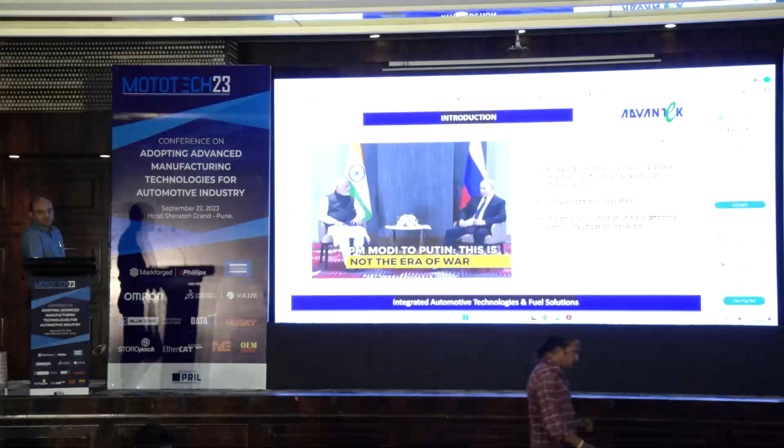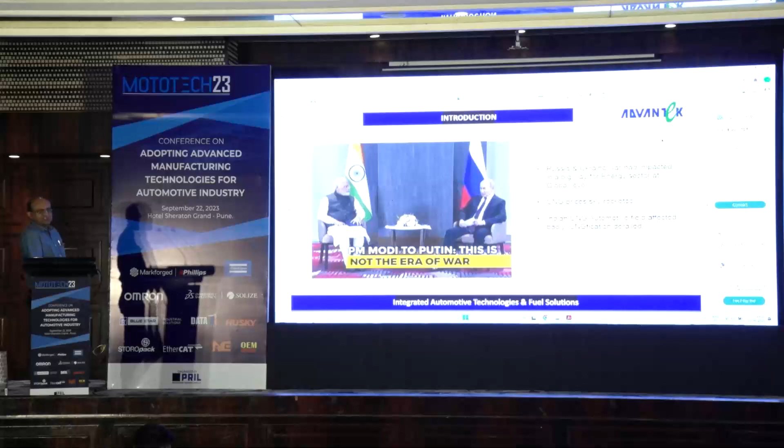We'll briefly discuss what is happening at the global level. The sentence, "This is not the era of war," became world famous. And it impacted the fuel industry in a big way. CNG prices skyrocketed and it badly pushed the CNG market down. Now we say this era is for alternate fuels. We have seen a lot of things happening in G20, and the Global Biofuel Alliance was formed with the leadership of India with many countries participating.

A very interesting story of automotives, and I'm very happy I'm part of that. An inspiring journey of the last 125 years to aspiring humankind. When the first automobile was ready, it was steam powered. Water was the intake. Now again water is the intake, indirectly or directly, through H2 fuel cell vehicles, and even the exhaust is water. Earlier there were no norms for emission. Now the norm is no emission. I'm just trying to build an interesting link in this field. People always say wheels can't be reinvented, but alternate fuel is making us experience that yes, wheels can be accelerated.

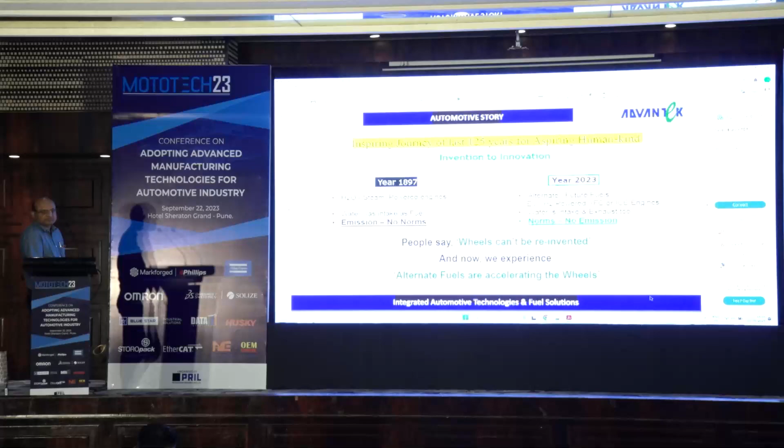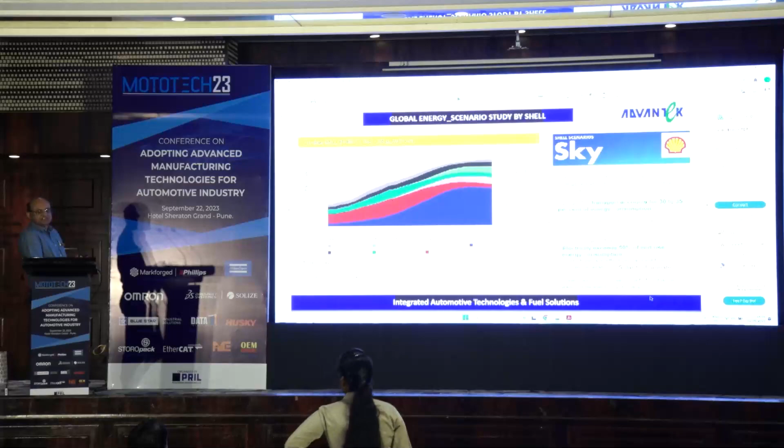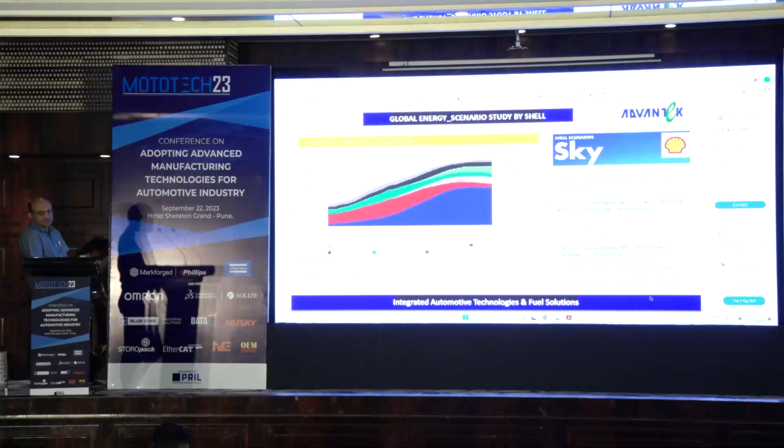This is a study by Shell. Shell top officials met me in 2014 when I was in Tata Motors. They said that EV will not come, electric energy will not come in this world for at least 50-60 years. The same Shell is saying by 2070 or 2080, 50% of energy requirement will be from electric sources. They have given some justification and backup. All the cars will be electric by 2050 at a global level, and things are happening that way.

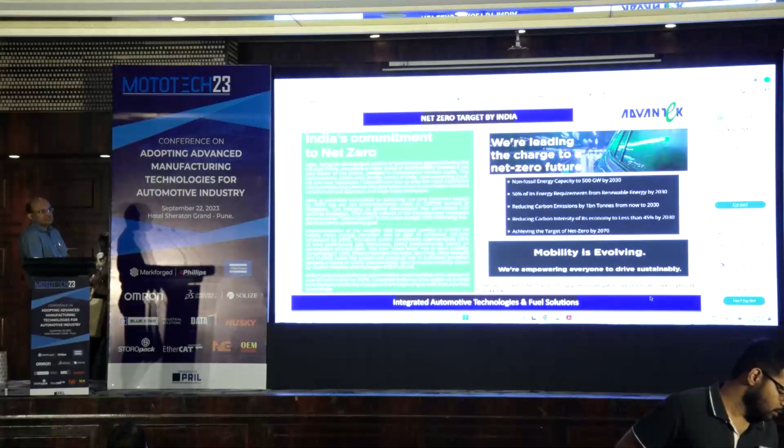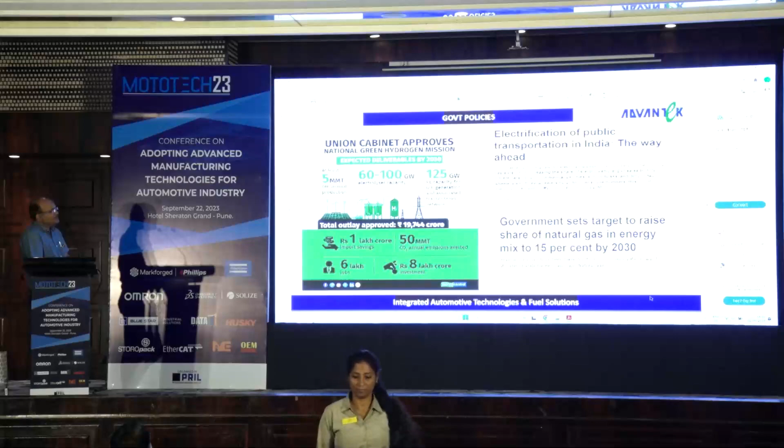India is committed, and almost 150 plus countries have said they will meet their net zero target by 2050. But India being a big country with huge demography and population, our government has taken the target of net zero by 2070. It is a long period, but we are going very aggressively on that. Some time back, the hydrogen mission was formed with the target of making 5 MMT green hydrogen with 60 to 100 gigawatt capacity of electrolyzers, and certain specific targets were there and huge money outlay was planned.

On the other side, the government is saying that we should have huge electrification by 2030, like 70% CVs, 30% PVs and almost 80-90% two-wheelers and three-wheelers. There is a little doubt how 70% can be done for CVs, but something will come out and we as a complete industry have to work toward that. CNG contribution in the energy mix is now 6%. It is planned to take it to 15% by 2030.

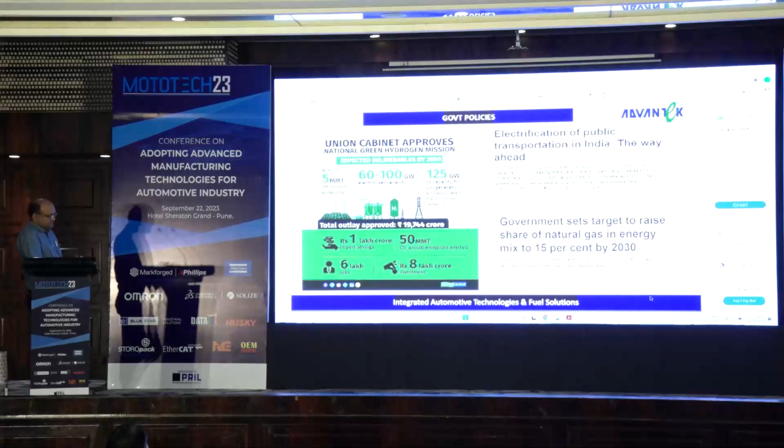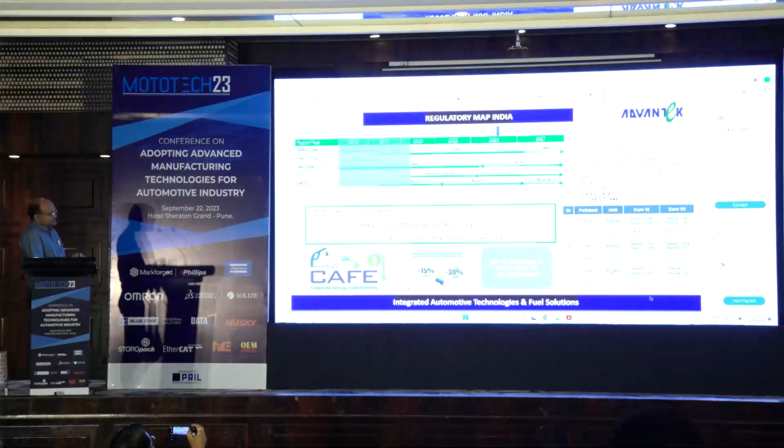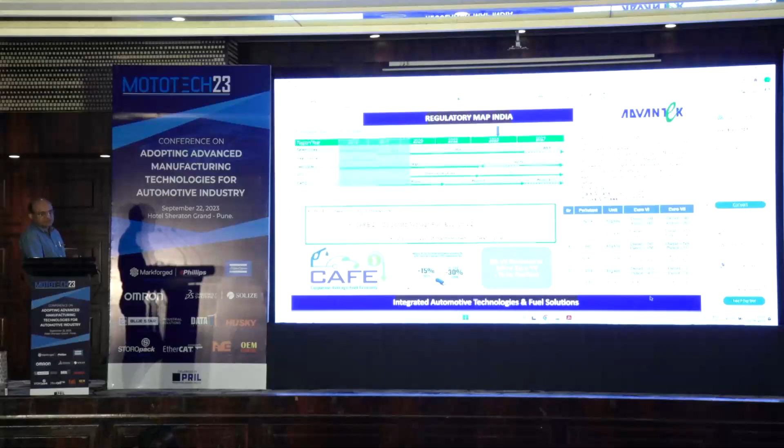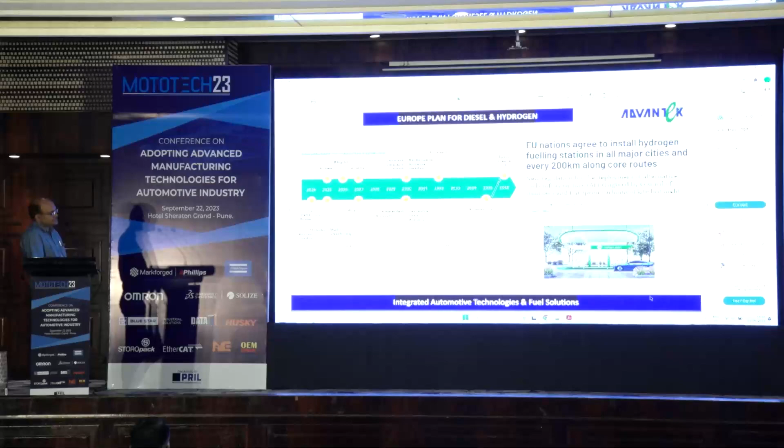From a regulation point of view, right now in 2023, BS7 will come, hopefully by 2025, and it is a very strict norm, at par with Euro 7. BS7 can affect alternate fuels a lot, so this is very important from that angle. CAFE norms were supposed to come, but they have not come. This again will help alternate fuels in a big way. At the international level, Europe has decided that they will ban diesel engines from certain years, from 2024 to 2030. At the same time, the same Europe says that they will start putting up hydrogen facilities. Something different from the India perspective.

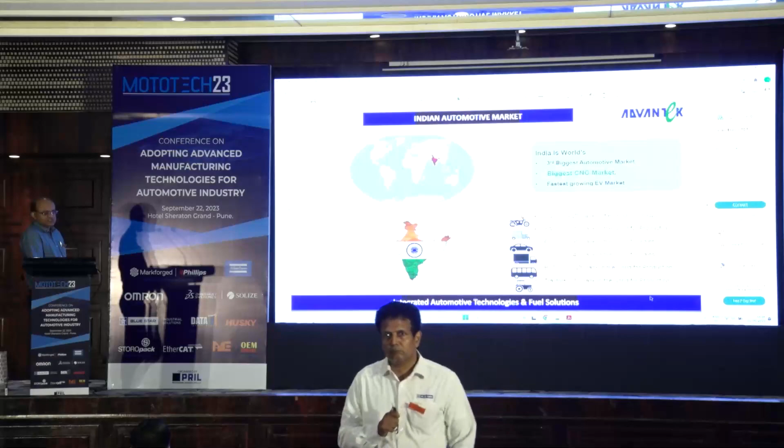We'll go to a little bit of statistics. I will not spend more time, but it is very interesting. I wanted to maintain the flow also. From this stage, I'm very happy to declare that India is the world's biggest CNG market. I tried to find out a lot of information, met in many network forums. Nobody could say it, but with my statistics, it is very clear that India is the world's biggest CNG market.

One of the fastest moving EV markets, and now we are number 3 as a whole automotive market by the amount of money involved. At the same time, in two-wheelers we have the second rank in the world. Three-wheeler, first rank. PV, third rank. CV, fourth. Bus, second, and tractors, number 1. So, huge scope for India because of a lot of product mixes available, and we are moving very aggressively.

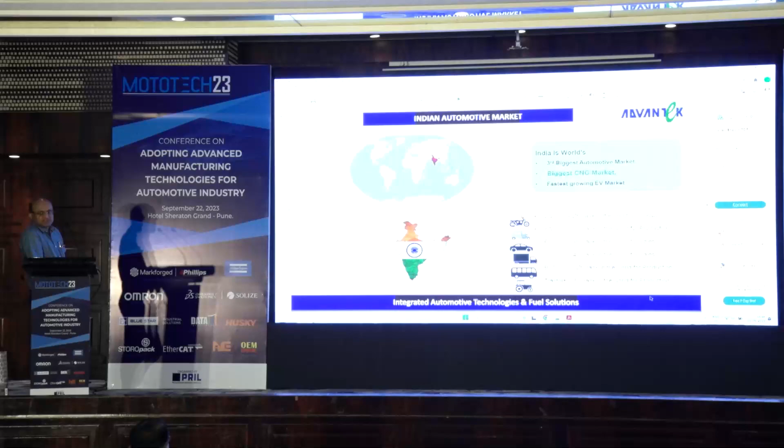Just again statistics, some time back somebody asked about stations. So, EV charging stations, almost 5,000 are there right now. H2 filling stations are only 2, just for some development purpose. And diesel, petrol almost 80,000, CNG 5,700, LPG 1,177, but LPG is dying, almost dying. Only three-wheelers are there. I was saying third biggest automotive market, which is perfectly aligned to make India the third largest economy. That's a direct correlation.

I will not spend more time here. EV contributed 5.4% last year. CNG contributed 3% by volume, and it is growing very fast. This is about two-wheelers, again moving very fast.

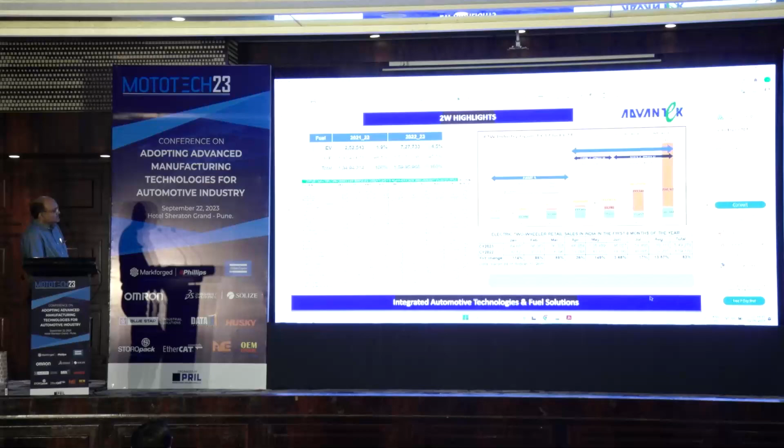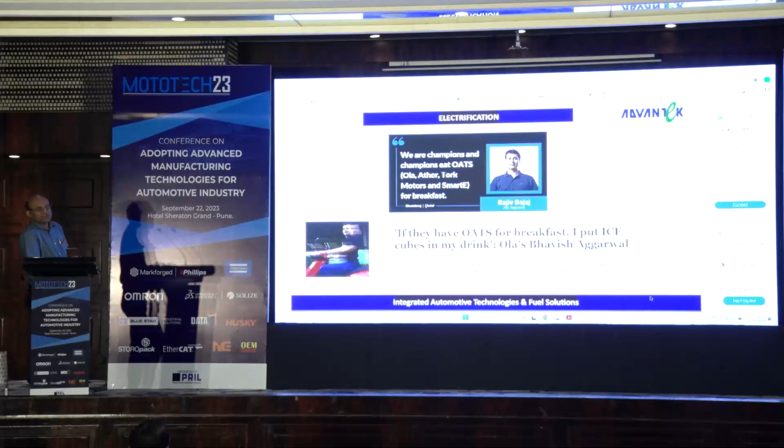I remember this kind of intense fight between these OEMs. Somebody said in two-wheelers there are a lot of new players, legacy players are not much there. So Mr. Bajaj said, we eat oats. The answer given by Ola was, we put ice cubes in our drinks. See how the fight is going. Ultimately, the customer is going to benefit.

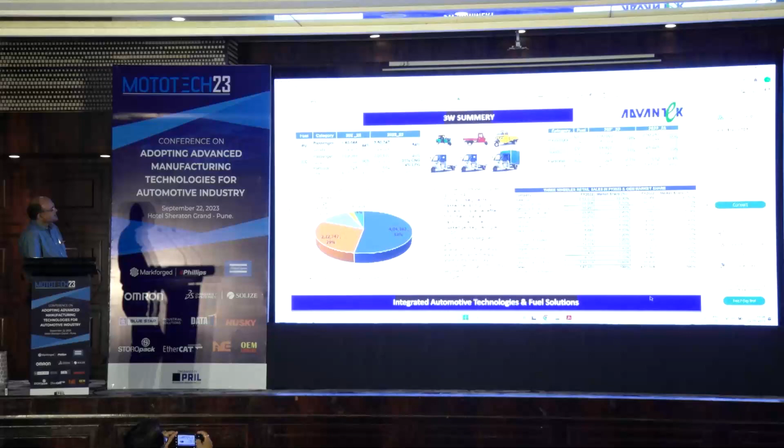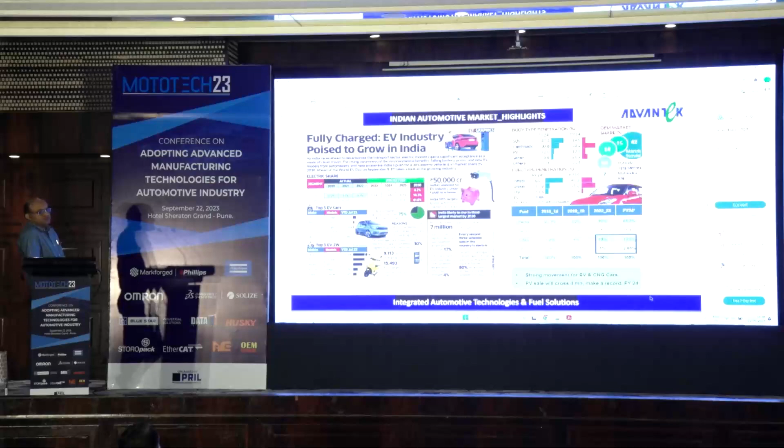Three-wheeler has the highest penetration of EV, 54% and growing very rapidly. CNG almost 31%. Only LPG with three-wheeler is 4%. If you see in PV, CNGification and electric are moving very fast. You see the change in even the last 1 year. 10% to 13.5, even 1% to 2.3%. So even in 1 year, a huge change, so we can understand the pace of change or rate of change.

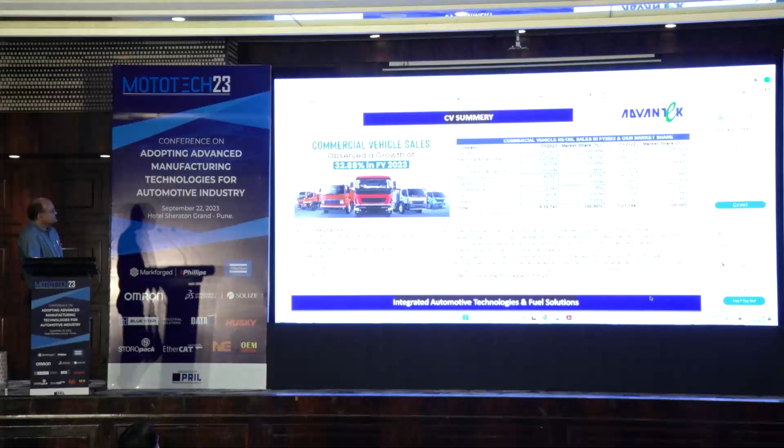CV now only has CNG, almost 9 to 10%, or last year it was 11%. But huge scope for other options, we'll see next. The tractor industry, the world's biggest tractor industry is in India, and right now they're only on diesel. So I think it's a good option to go for CNG for many other reasons. Nobody explored this, but huge scope for us.

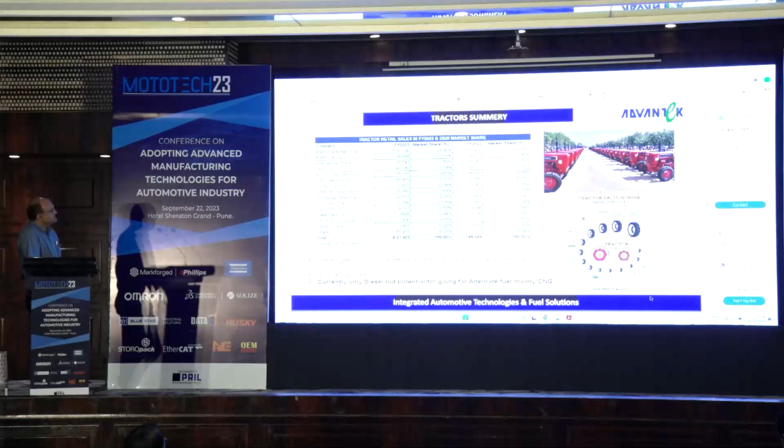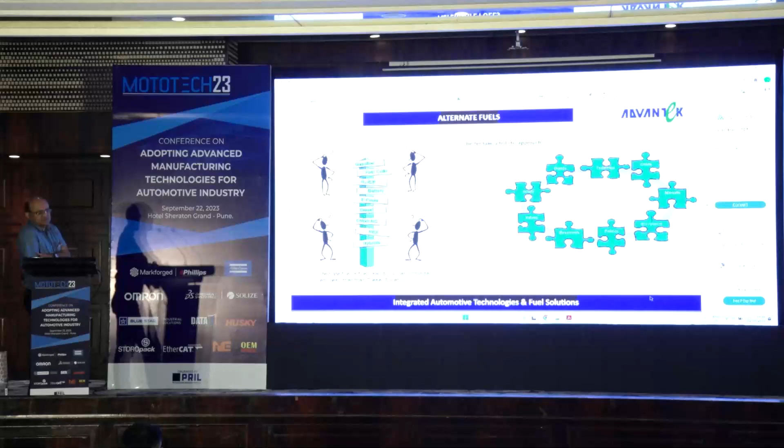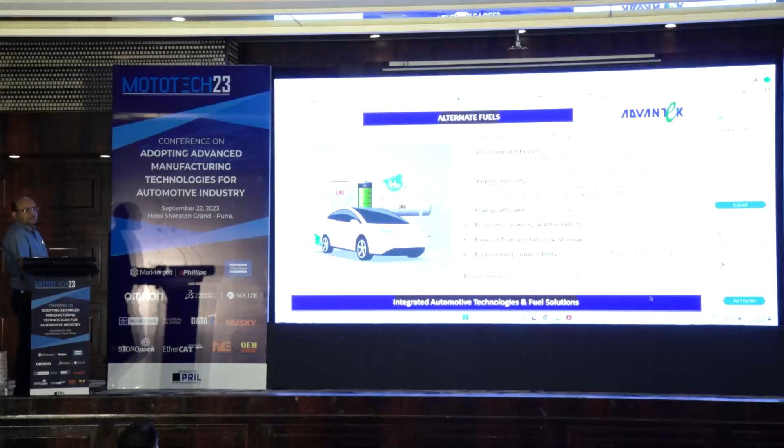Now we'll see what the alternate fuel options are. Right now we are confused what to do. Policy is not clear, they are not integrated. But as a whole industry, we have to make very great efforts, have some synergy, good team building like that. As per me, for any fuel to become an alternate fuel, 6 E's are required. First is environment friendly. Of course, we have to meet emission norms, and it should be environment friendly. Energy security, that means we should get the raw material required for energy in-house, local. Of course, it should be energy efficient.

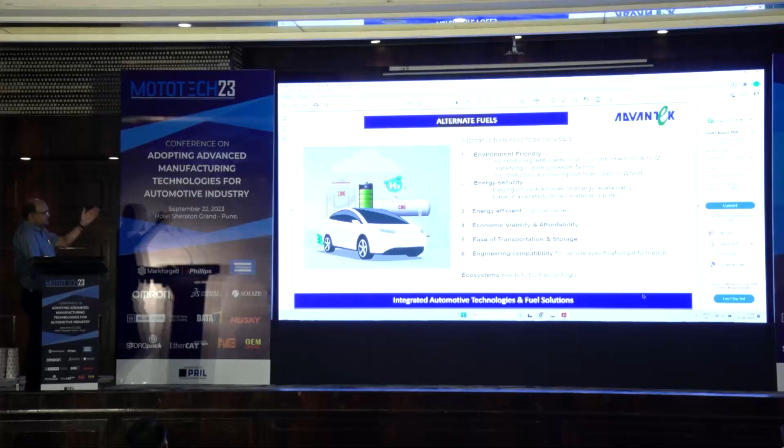Of course, it should have economic viability from a complete capex kind of view, even for customers to afford the fuel cost. At the same time, it should be easy for handling and transportation, and a compatible vehicle. What kind of vehicle should meet the target? Because there is always some relation between fuel and vehicle class. We should meet that. So therefore, we have to have the whole ecosystem ready for that. I prepared this with a lot of effort because I could not find anywhere on the internet how to classify fuels.

Both these biofuels and synthetic fuels are basically converted from waste. So what to do with waste is a big problem, and how to get energy is a big problem. So one problem is solving another problem. So right from waste we are converting to reusable or efficient energy. It's very interesting, and we have to give huge focus to that.

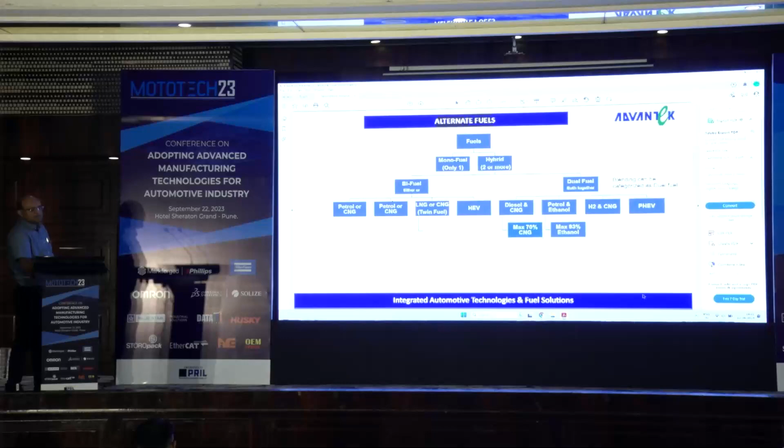Once we developed this CNG and LNG with one OEM, very interesting. Both are basically the same fuel. So we're giving it the name twin fuel, because only the storage becomes different, and the next parts like regulator, filter, and the rest of the fuel system remain the same. So a very interesting proposal. We are giving it the name twin fuel.

In dual fuel, diesel and CNG, max 70% CNG can work, and basically this technology is given in generators, but even vehicles also have that. Petrol, ethanol. Ethanol is being mixed in petrol. Right now, India is at 10%, but there is a big plan to go to 20% by 2025. And ultimately, you can go max up to 85%. That is called flex fuel.

Even next is hydrogen and CNG. We can mix some percentage of hydrogen in CNG to make that fuel more efficient. People say 5%, 10%. We are developing the technology with SAE and COEP, so we'll get to know more on that. And next is plug-in hybrid, where two fuels are run together.

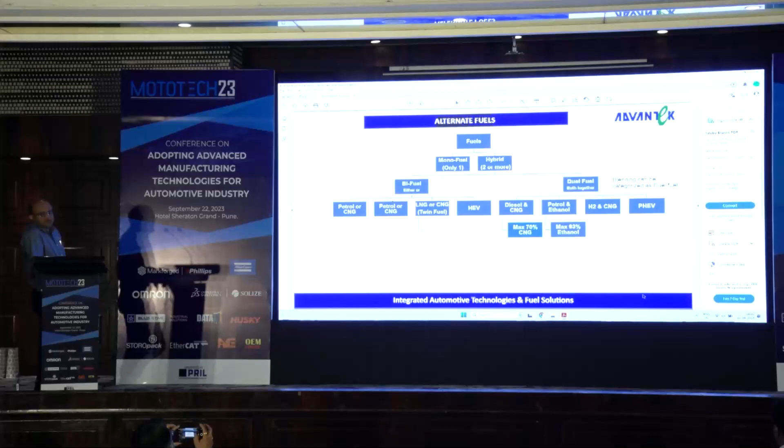Again, one more fundamental is fuel blending. Instead of developing new fuel, just mix some alternate fuel in the main fuel. I said ethanol is already there, 10%. Next is 20% from 2025, which was preponed from 2030. And now people are thinking of 5% biodiesel in main diesel. We'll see what biofuel is next. It is going to take some time. Therefore, people are thinking, how can we blend ethanol in diesel? A lot of trials are going on.

One more field coming is methanol. People even say methanol economy. Huge scope for methanol. 15% blending can be done in petrol. Again, things are happening. And I said hydrogen mixing in CNG. So these are the fuel blending options. A lot of things will happen. Percentages will become plus or minus, but things are happening, and it's going to help directly save on the import bill.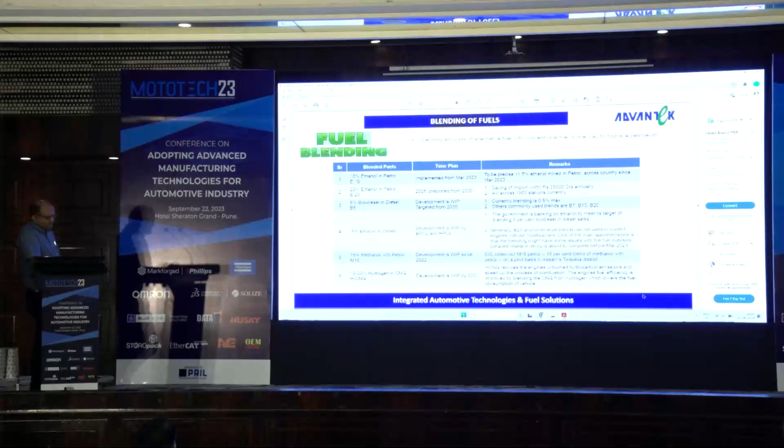Next is biogas. Biogas has a lot of names, so people get confused. It's mainly gobar gas, a word we have known for many years. Then purified biogas is called bio-CNG, which again is RNG. The names are different, but the meaning is the same. This is purified biogas. Compressed biogas, people say CBG, is the same biogas compressed to store it effectively. Ethanol, bioethanol and methanol are again liquid fuels converted from waste.

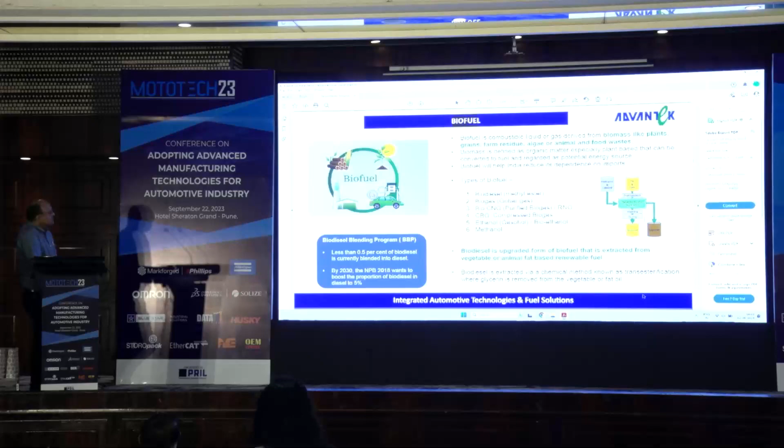So our government has very proactively formed a strategy or policy for biofuels. The recent focus from the G20 will make things more and more clear, and we are working with a lot of ministries. They're giving us a chance to come together and express our opinion. And the main important benefit is biofuels will not ask for any big change in the vehicle or in storage systems. So no big change in storage and no big change in vehicle. So it becomes very easy to use.

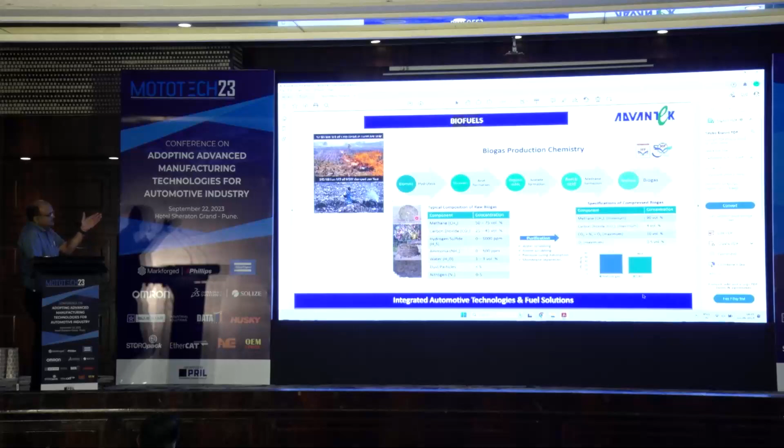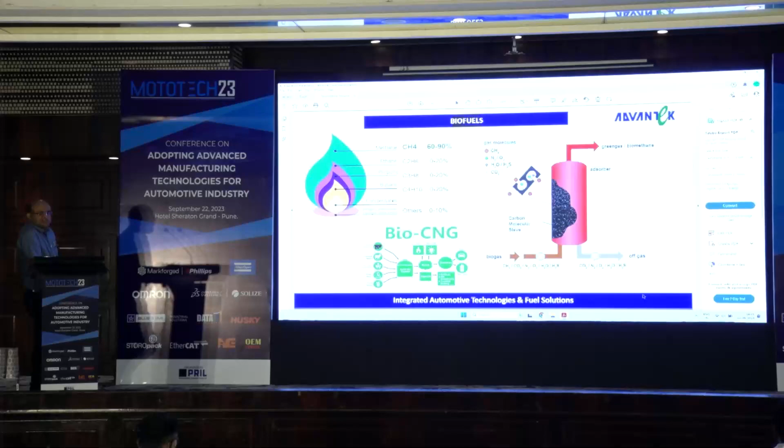Some process is given, again converting from waste; these are the chemical reactions. A lot of formulas are there. We'll not go that deep. Even just by sending biogas into an adsorber, which is basically carbon, we can get biomethane. So many times things are very simple. We have not given them sufficient time and effort.

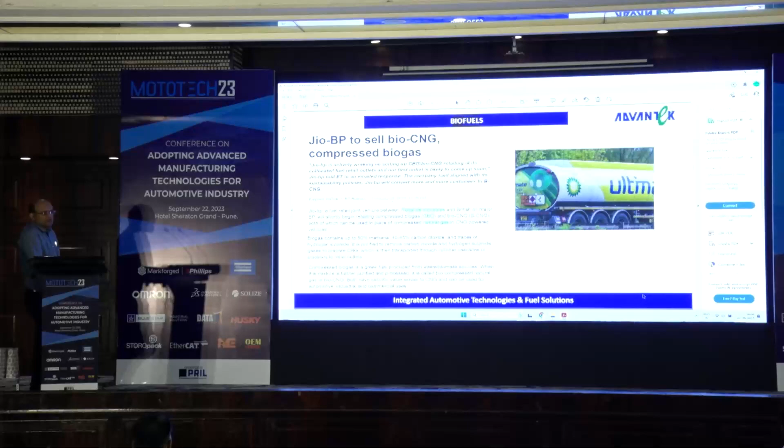When Reliance enters, things happen. That's my opinion, because they're entering bio-CNG, they're entering hydrogen in a big way. So whatever timeline we say, my opinion is when Reliance enters, things can perform. So we have to be ready for that.

One more fuel category, synthetic fuels, is a very interesting fundamental: whatever carbon is emitted by industrial exhaust, industrial waste, or even vehicle exhaust is collected back into the chain, combined with hydrogen through some chemical reaction. There are different names, the FT process; we will not go into that detail. And again, fuels very similar to diesel, petrol, and fossil fuels are generated.

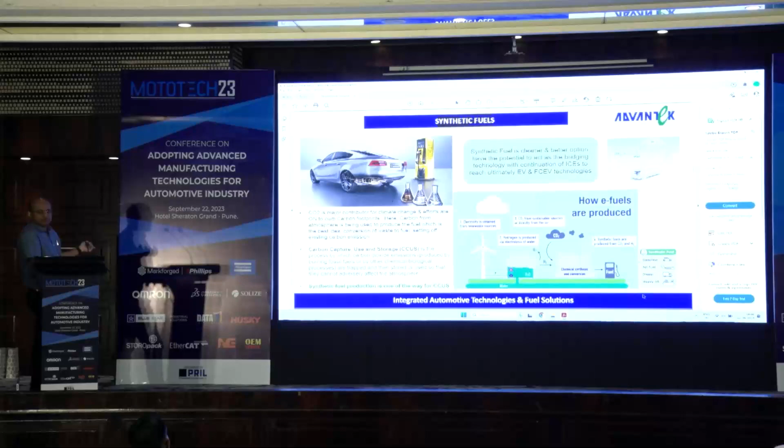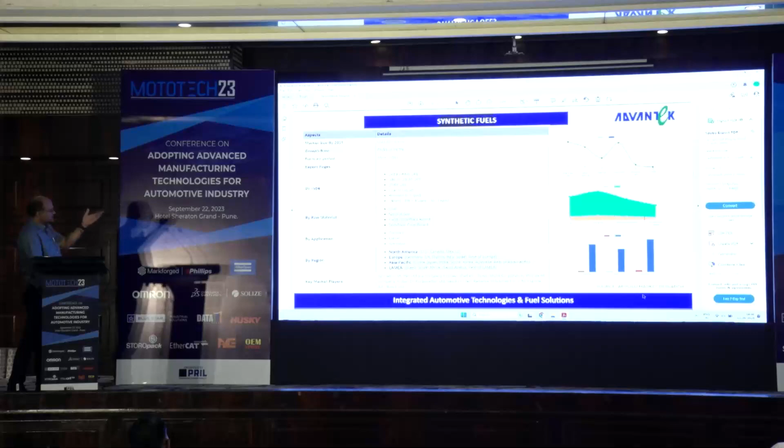So it's very interesting fundamentals here also. There are various types of synthetic fuels by type, by raw material, application. We will not go in deep. A lot of efforts are being put there.

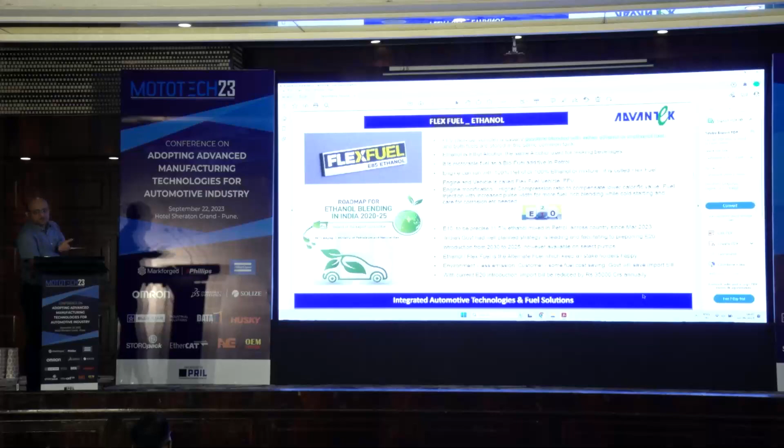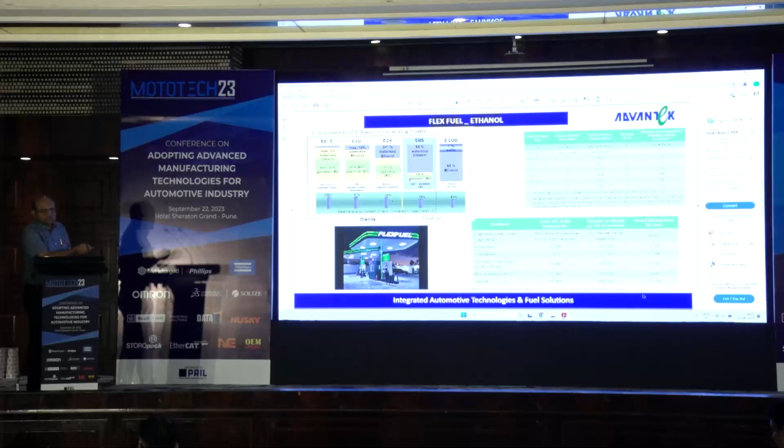Flex fuel, which I said some time back, ethanol is added 10%, but we can go up to 93%, and absolutely we can run. It's called flex fuel because you can run 0% to 100% ethanol petrol. We have to program ECUs and the whole chain, and basically fuel lines to have corrosion resistance power. So the vehicle can run any mix. These are the typical E10, E24, E85, generally used mainly in Brazil, US and other parts of the world. For practicality, we can have any mixture.

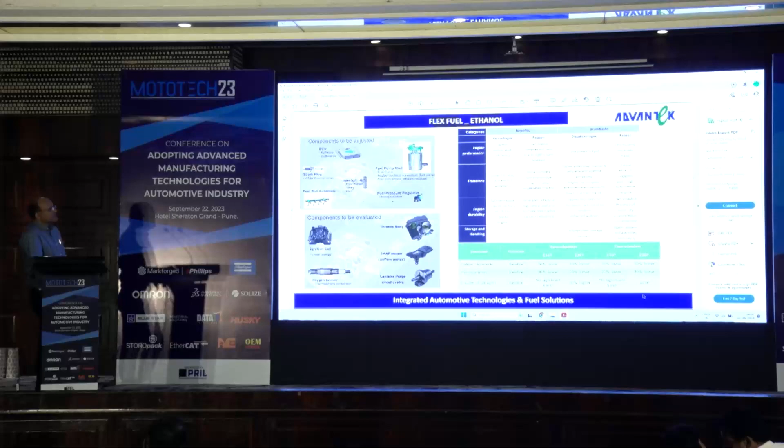What kind of changes are required for the vehicle, what kind of benefit we'll get, just mapped it there. This is a very interesting fundamental, something different launched by Toyota, which is the first flex fuel, and it was clubbed with electric. So electric and the other fuel is biofuel, but flex fuel itself is dual fuel. So it's a combination of biofuel and flex dual fuel. So they have launched the vehicle as a demonstration technically, but soon it will come in the market.

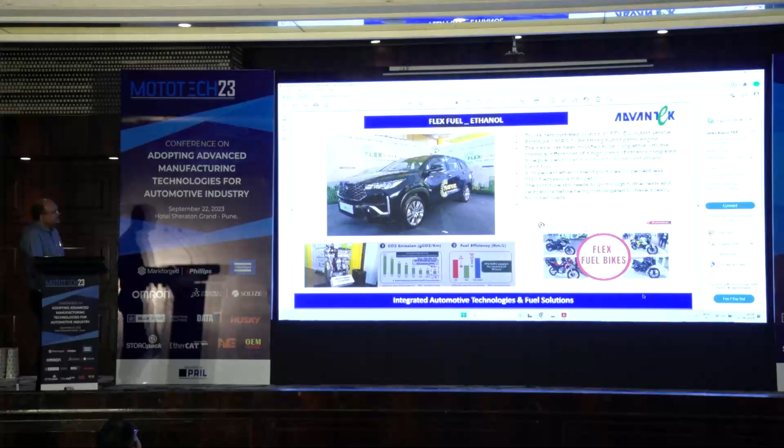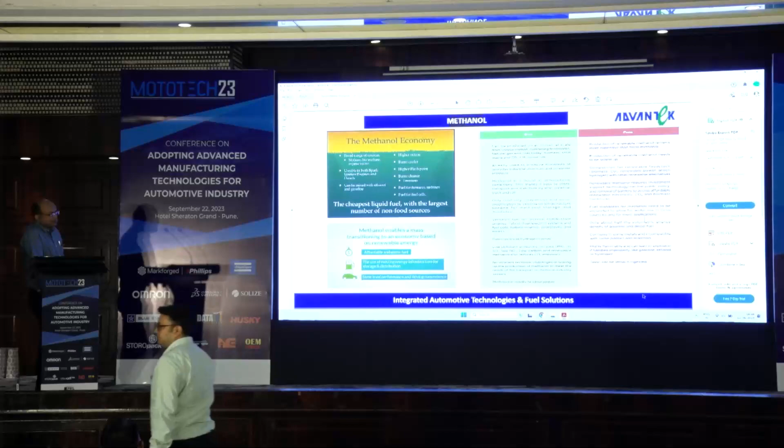Methanol, I said, again part of biofuel. Again, a lot of good efforts are being put, and I think people are saying that methanol can be used better in CVs, diesel engines. It has to have SI, but it will be good if you could use methanol for commercial vehicles, which can replace diesel, in short.

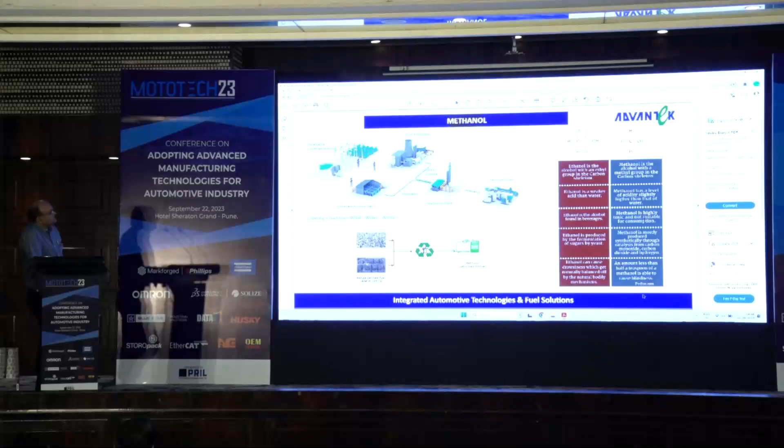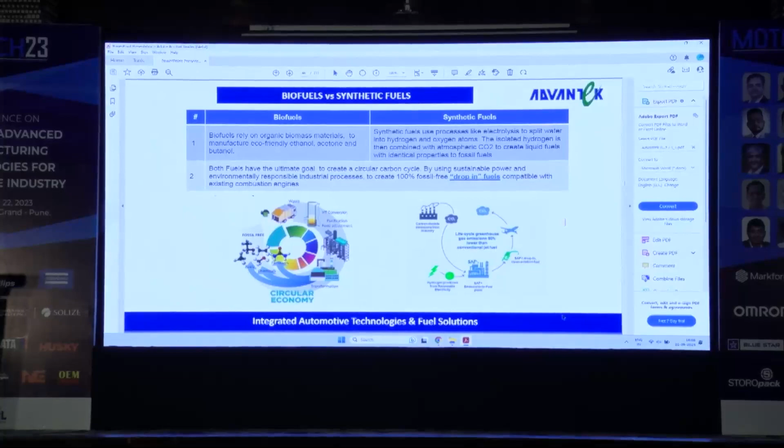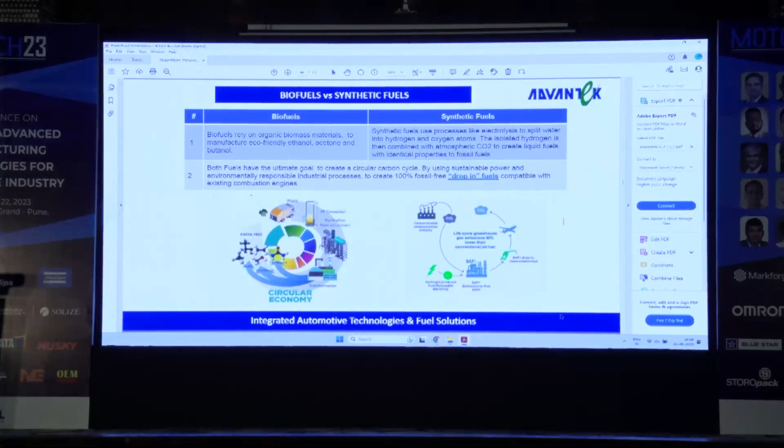So comparison and some changes. Biofuel and synthetic fuels, basic properties remain the same. The only difference is how they are made. I said synthetic fuel is basically capturing carbon from atmosphere and waste, and conversion through a chemical process to fuel. And biofuels, we have seen some time back, conversion from waste to energy. And people always talk circular economy. Nothing but we are using the same parts again and again in the whole circular economy.

I'm trying to make things simple, and when I started learning because of this offer to speak, I really went so deep and am getting really enriched. So I'm happy. I'm not an expert, but I'm learning, sharing, and by sharing I'm getting more and more knowledge.

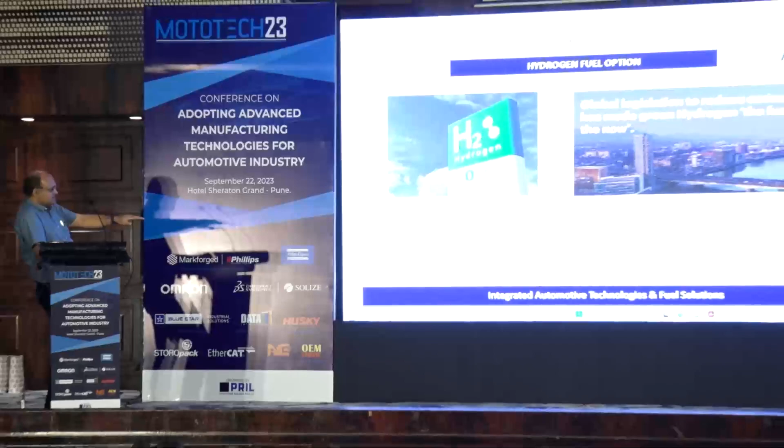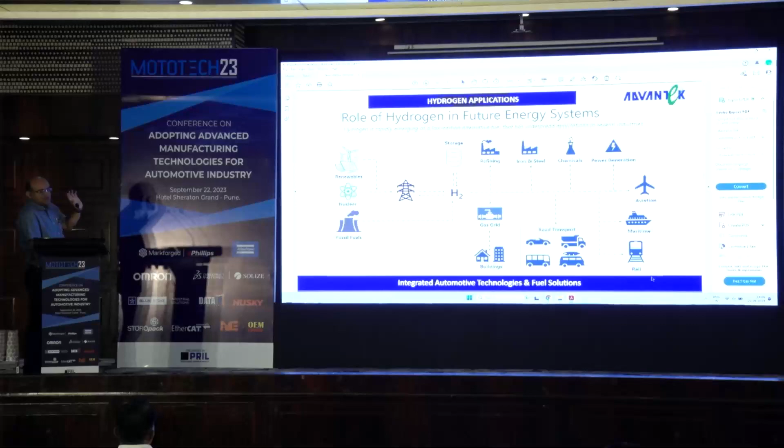Electric vehicles, we have a lot of electric vehicles. I will not speak more because the whole world talks, so I will not talk on that subject. We'll talk more on hydrogen. Hydrogen, there are three ways to use hydrogen: hydrogen mixing, H2ICE, that means IC engines, and fuel cell. There are huge benefits of hydrogen. Hydrogen can be used in various fields, various applications. So the future is hydrogen, that's very sure.

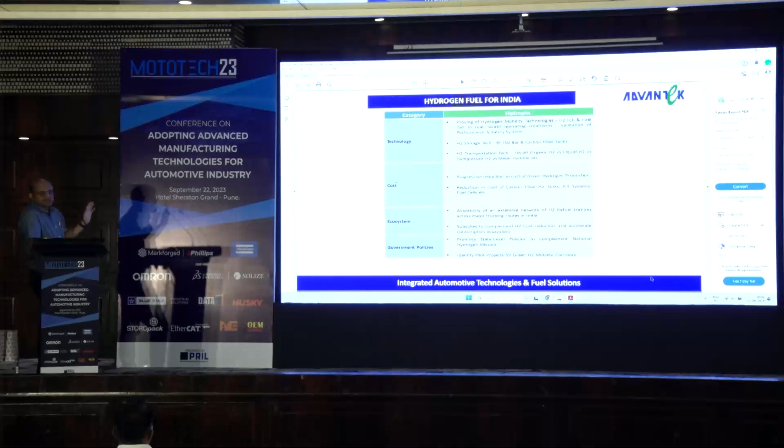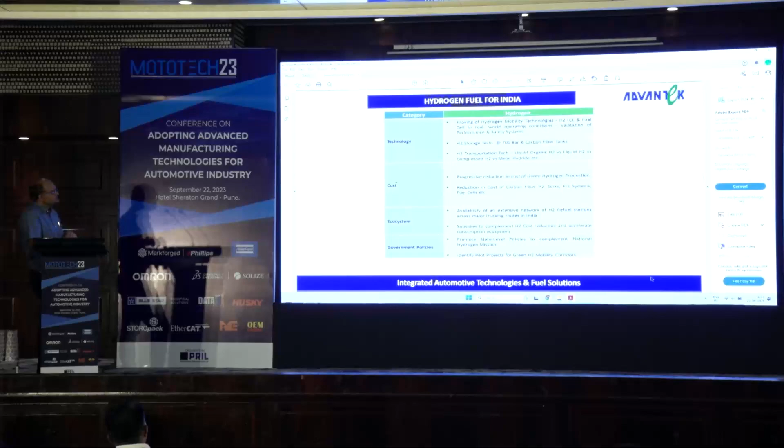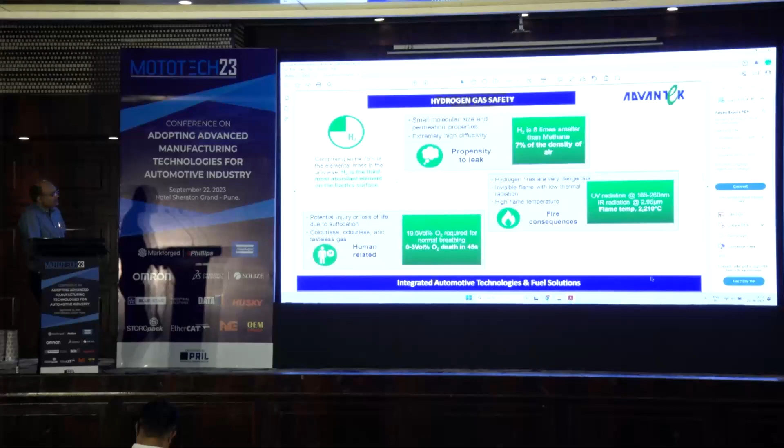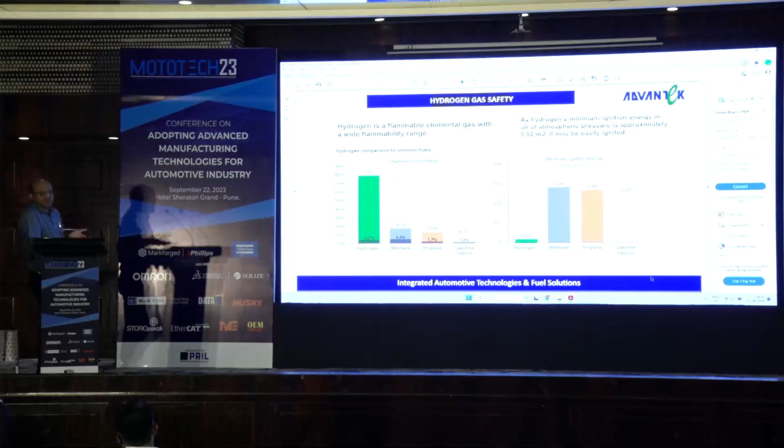Again, people always say hydrogen is a bomb. You see the qualities of hydrogen, it's very risky to handle, but if you take proper precautions, nothing difficult. Hydrogen requires very little energy to ignite, and it has a very wide band to burn, from 4% to 75%. If the mixture with air is from 4% to 75%, it can catch fire. And it is odorless, we cannot see it, you cannot even see the flame. So it's very difficult to work with hydrogen.

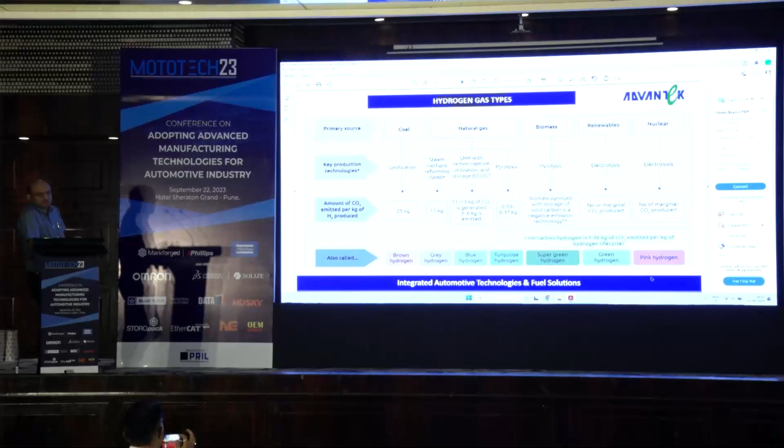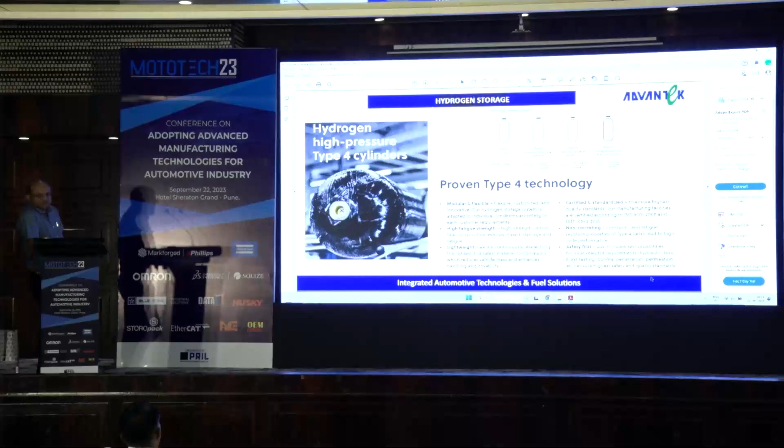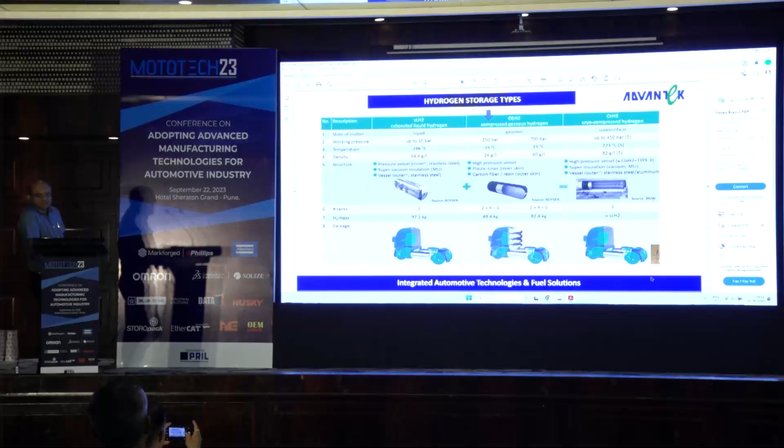People always talk about various colors of hydrogen. The basic reason is how it is made. But of course, we are focusing on green hydrogen, which is basically electrolysis. Type 4 cylinders are being used for hydrogen. How it works is similar to CNG, which is type 1, but here pressure is 350 bar. Now to increase the capacity or range, people are talking about 700 bar, 1000 bar, plus liquid hydrogen. Depending on this, we can store more hydrogen so that your vehicle can go further.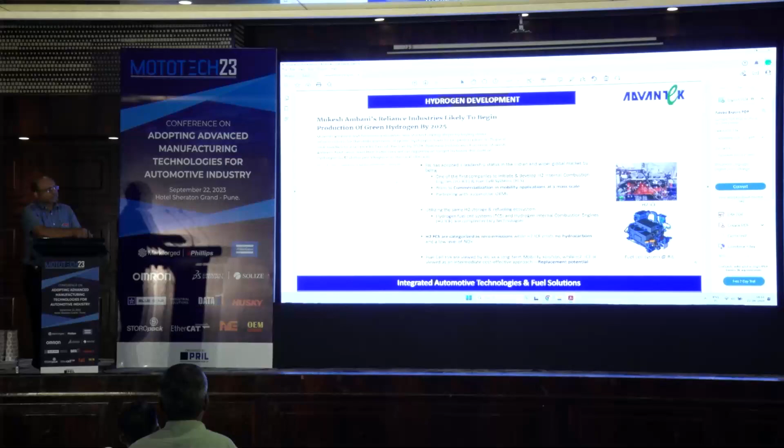Alternate fuels are going to play a very big role, and we have to be catching the whole game. And from this dais, I'm saying: why call them alternate fuels? They are going to have good value. Why can't we say future fuels? Because alternate is a low profile word. So just as an idea or suggestion.